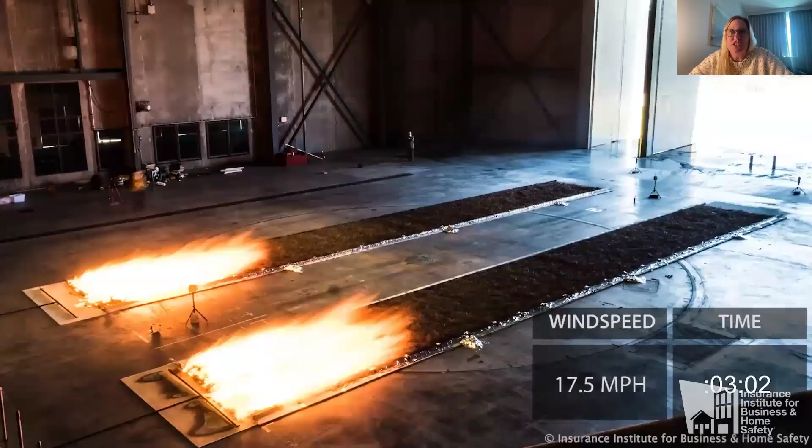All right. So about IBHS. So we know that severe weather disrupts lives and causes financial loss. IBHS delivers cutting-edge research to prevent avoidable suffering, strengthen buildings, inform insurers, and support resilient communities. As an independent nonprofit, IBHS studies wildfire, wind, rain, and hail to develop real-world solutions that help homeowners and businesses build stronger, safer communities. Today, we're going to talk about the latest wildfire science and our program developed based on our research.

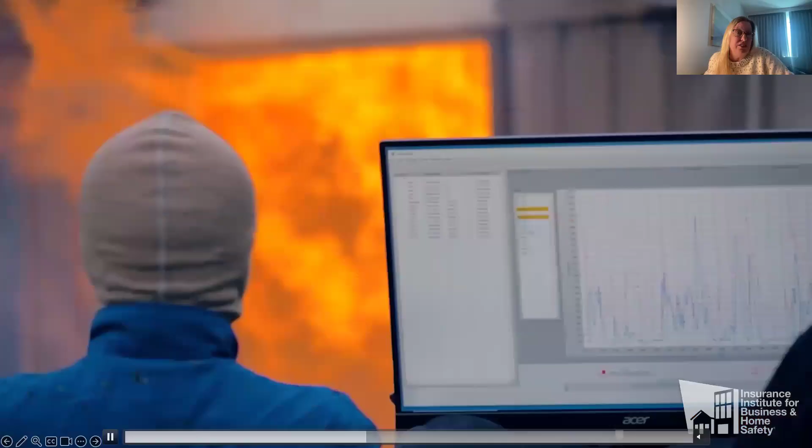Some of this video shows some of the cool research that we do at our lab, and we're going to go through how we do research both in the field and at our research center. So next, this shows you a little bit of the video, what we see. We go out into the field for post events, see what happens in the real world, and then take that back to our research center in Richburg, South Carolina.

And then we analyze each one of the components to see exactly what happens here, why did this happen in the field, and can we replicate it in real life? And eventually this comes out into effective solutions for homeowners and business owners.

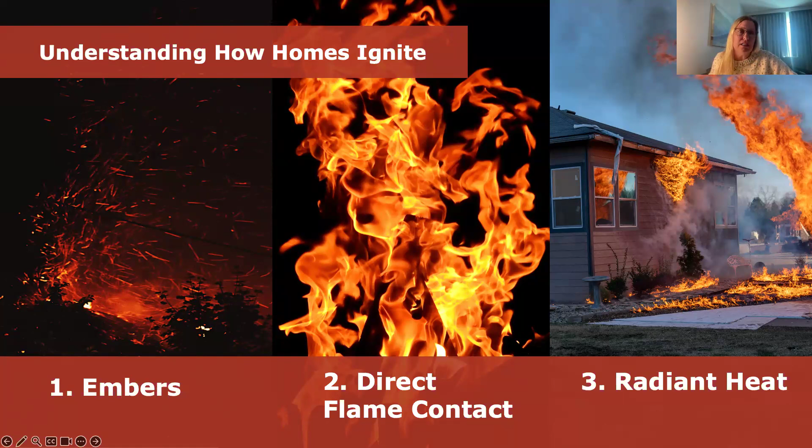So next, the first thing that we want to know is how exactly do homes ignite in a wildfire event? So there's 3 ignition mechanisms. 1, from embers. Number 2, direct flame contact. And number 3, radiant heat. Embers are the leading cause of home ignitions, not the big wall of flames that a lot of people think. It's actually embers.

So wildfires typically enter communities through windborne embers that can travel miles ahead of that wildfire front. Those embers ignite spot fires around and on structures, and these fires generate more embers, leading to flames, radiant heat, and spreading the fire further. Structural embers are typically larger. So once that home catches on fire, those embers are larger than vegetative embers. And then of course, you add the wind component, and that worsens conditions, fanning the flames and carrying the embers deeper into the neighborhoods.

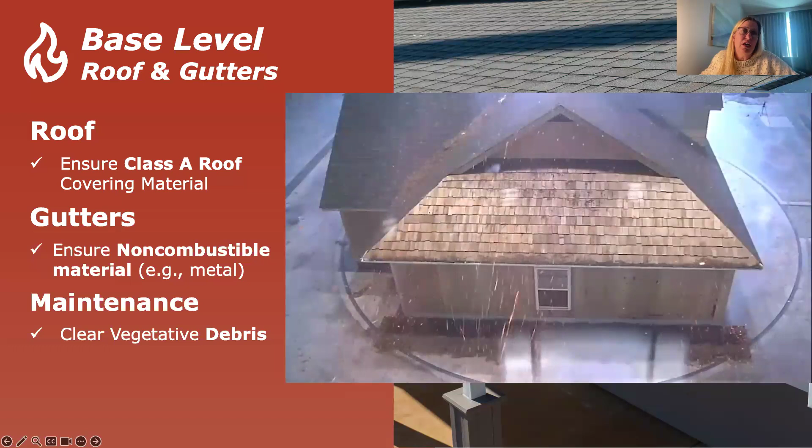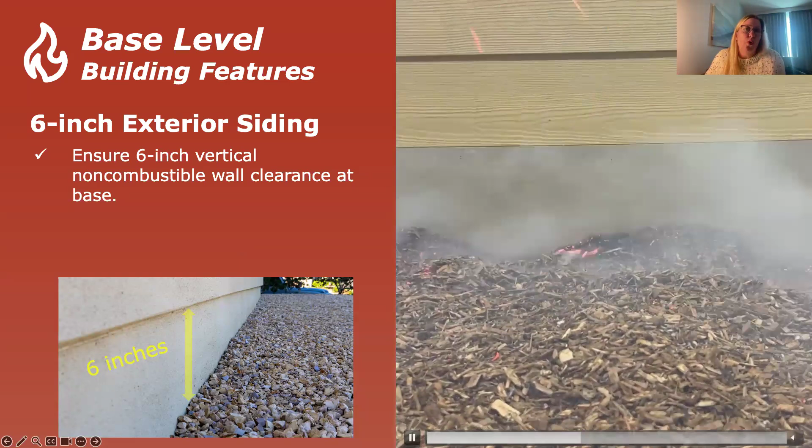Next, you want to have 6 inches of non-combustible exterior siding at the base of your walls. If you already have non-combustible siding, you're fine. The types of non-combustible materials are fiber cement, brick, stone, stucco, or as you can see here, exposed concrete foundation. The types of things that are non-compliant would be vinyl, wood, engineered wood, that type of thing.

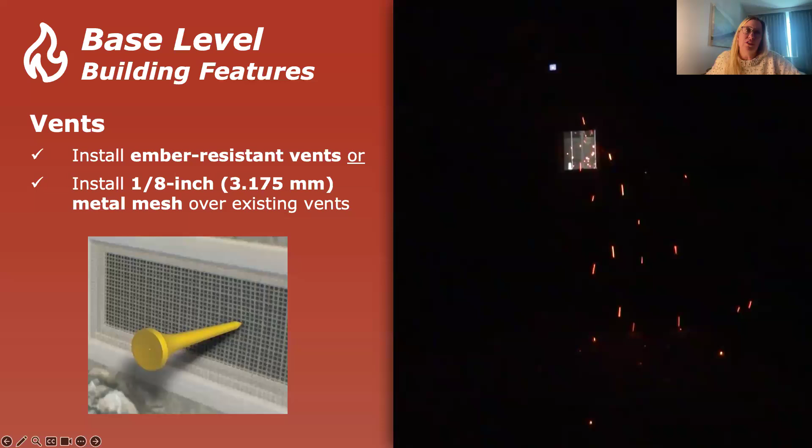Next, this is another big one for the base level. We know that vents are very vulnerable and can ignite your home from the inside out in an ember storm. So we've done testing on different size mesh, and typically most homes come with 1/4-inch mesh. So in modern building code, and through our testing in a wildfire prone area, we ask that you either install the ember resistant vents that you can purchase at the store, or you can order off of Amazon a whole roll of this 1/8-inch or about 3mm size metal mesh, and you can put that over your vents. If it's in the attic, you can do it from the inside.

Another way to test what size vents you already have on the house, you can use a golf tee or a pin or a nail. And if it doesn't go through the mesh, you've got the right size. If it goes all the way through, that mesh size is too big.

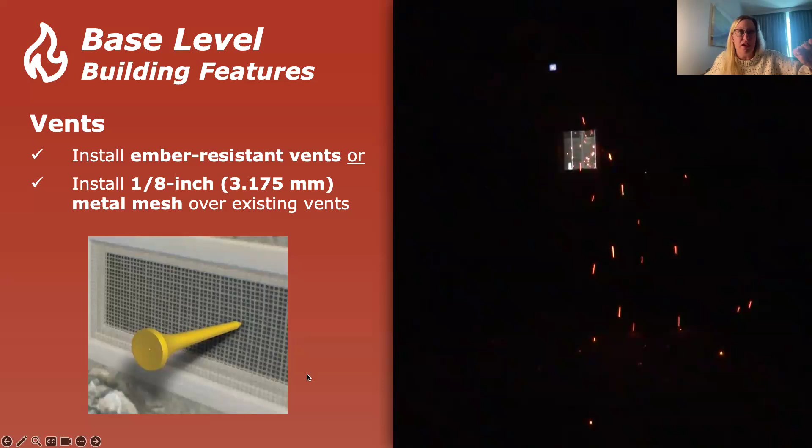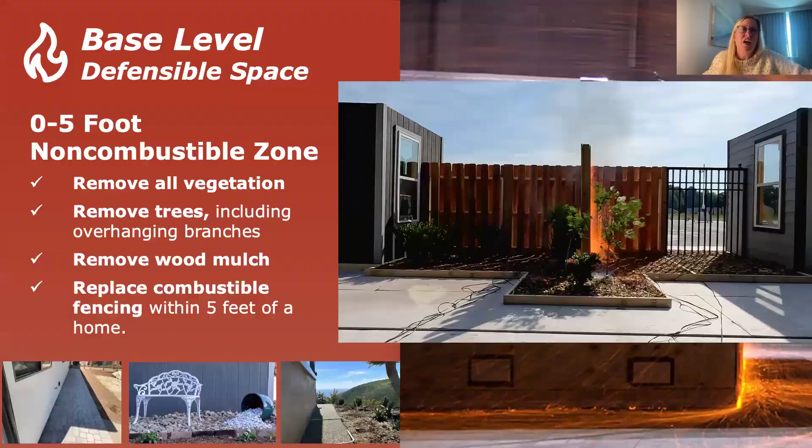So here, the 0 to 5 foot non-combustible zone, you've got to remove all of the vegetation, and that means everything. Trees, we do not allow any trees or overhanging branches in the 0 to 5 foot zone. Removing wood mulch, those are like tiny little matchsticks. And then, of course, combustible fence.

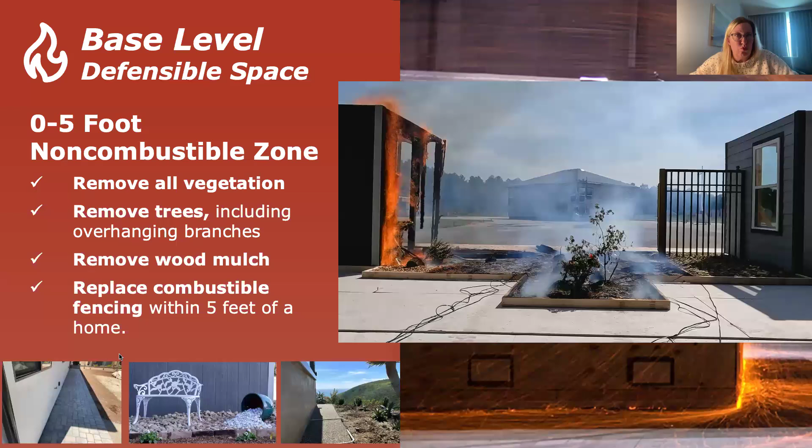This is a demonstration of mulch catching fire, then a bush, then the fence. And then the wood fence acts as if it's like a wick, like a candle, and brings it all the way to the home on the left there, igniting the home, breaking out the window, and then that's a total loss. As you see on the right, there's rocks down on the ground out to 5 feet, and a 5-foot metal fence. That's just replacing 5 feet. That's all we're asking. So if you have a wood fence and you need a retrofit, just that 5 feet, anywhere along the house, especially if it's attached to the home. And this is the most critical area.

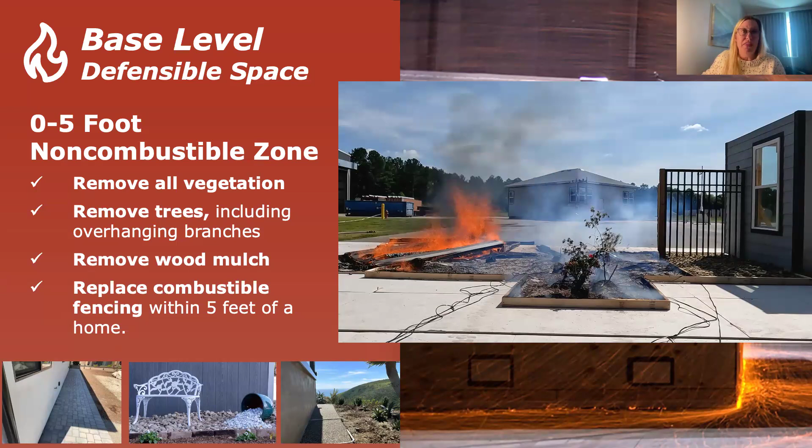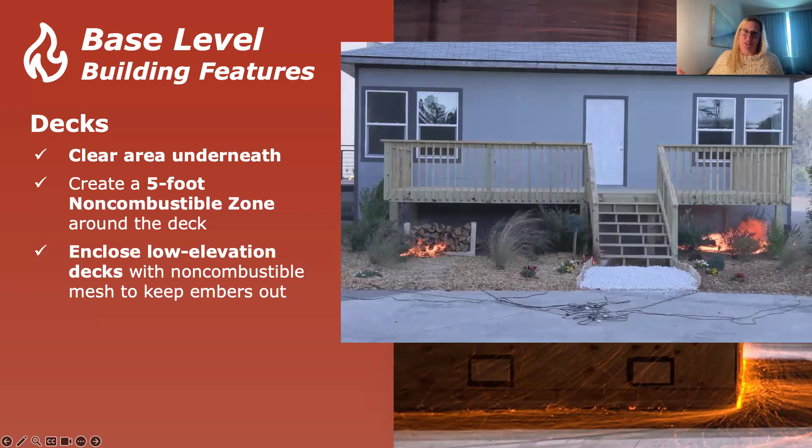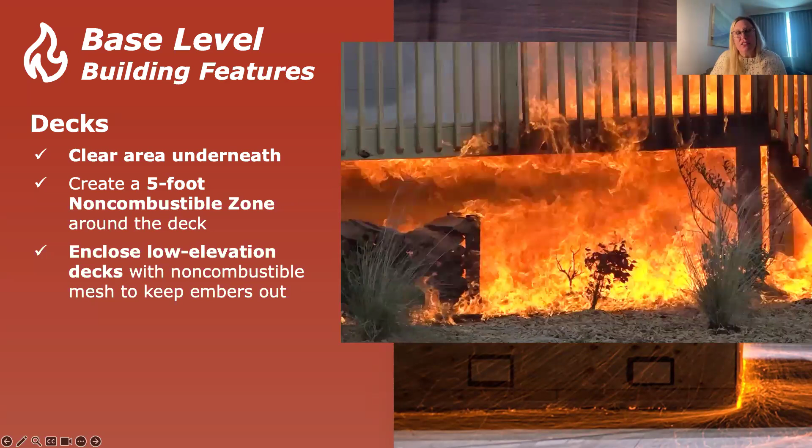All right, next. So for the base level, decks. We also know decks are vulnerable because typically they're made from wood, which we know is combustible, and it's attached right to the house. So you've got to clear the area underneath, no storage of any kind underneath there, creating that 5-foot zone under and around the deck. And then any decks that are about 4 feet or less, you're going to want to enclose with that 1/8-inch metal mesh. That will keep out the embers. It'll keep out debris. We know in a wind event, which carries the wildfire, it's going to put that vegetation under there, and then embers are going to get there and ignite it.

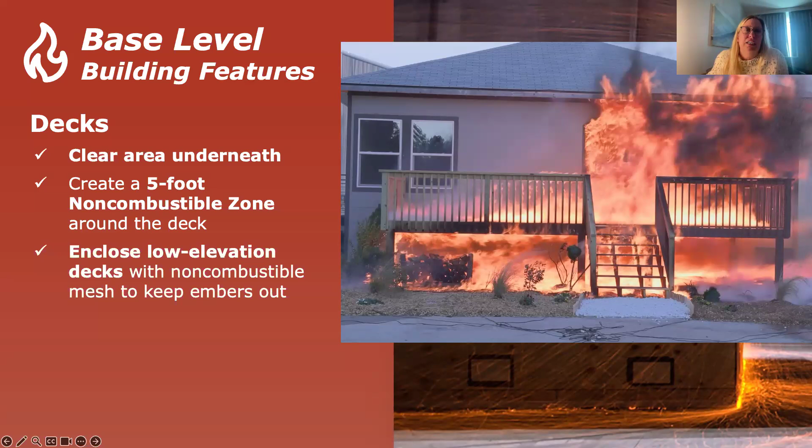So you want to maintain your yard, space out the vegetation. If you have structures like a shed or a hot tub, keep those spaced apart. And then, keep everything at least 10 feet away from the house, big things, and create that 0 to 5 foot non-combustible zone around them.

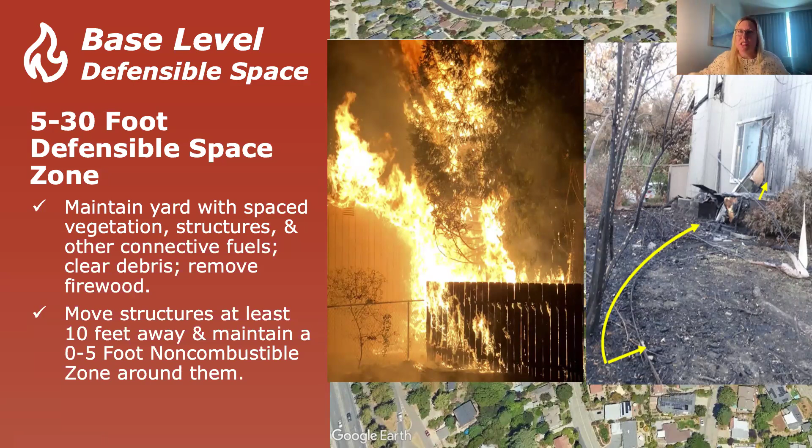Next, this is our next level. So this is where building materials are important. So the siding, you want to install non-combustible siding, and I mentioned those before, stucco, kind of a concrete type siding. And that is so radiant heat and flames can't ignite that siding.

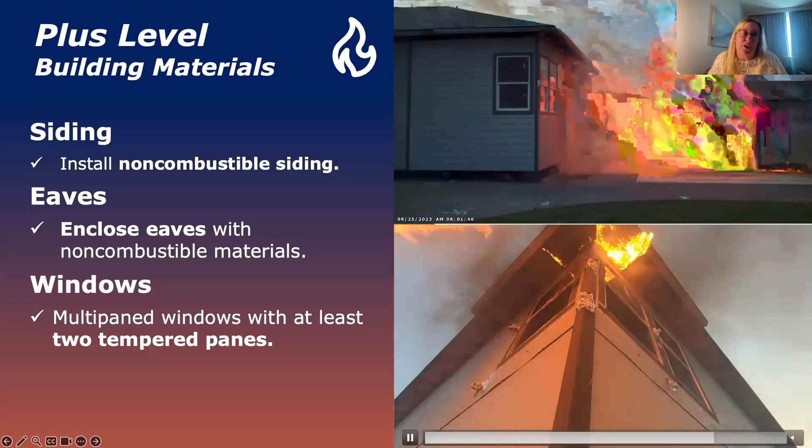And then windows. We've noticed with windows in some of our testing like this, that one of the panes will fall out because of the glazing around the window. So that's why we're asking for at least 2 panes to be tempered. That way, if one falls out, you still have a tempered layer in there. I believe the WUI compliance is one of them being tempered, but we require 2 being tempered. So we go a little bit above code on that.

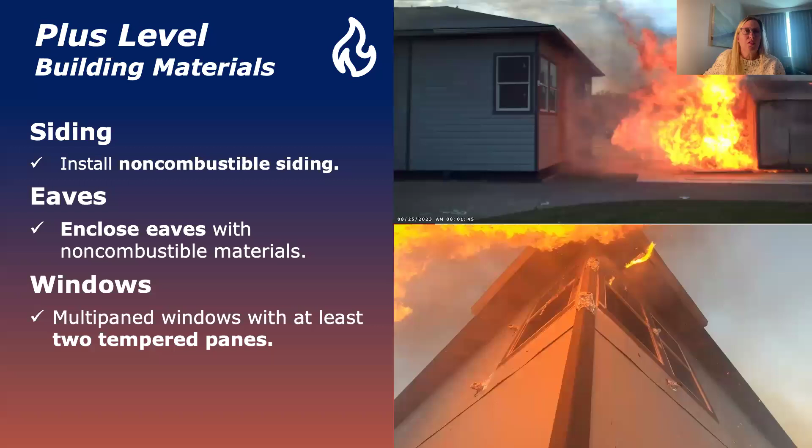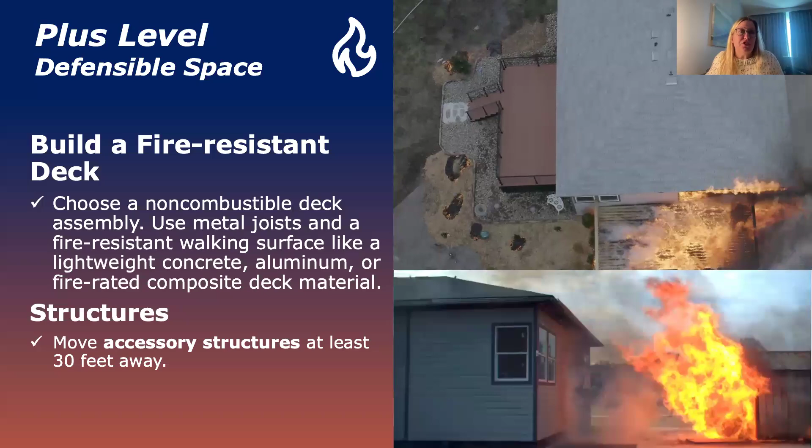And so while our research always continues, the modeling, recent field observations in Lahaina and Los Angeles areas, and experimental testing in the lab all point towards the same system of mitigation actions. So you can have confidence that these pieces matter. We're now looking at a neighborhood scale to solve for conflagration. So we're looking at building density, connective fuels, fuel loads.

And now I'll hand it over to Mark. Mark will provide some insight on our latest post-event deployment. Very good. Thanks, Amanda. Thank you, everybody. So we're going to talk through the LA fires a little bit and just give some examples of things we saw there and how they reinforce the mission.

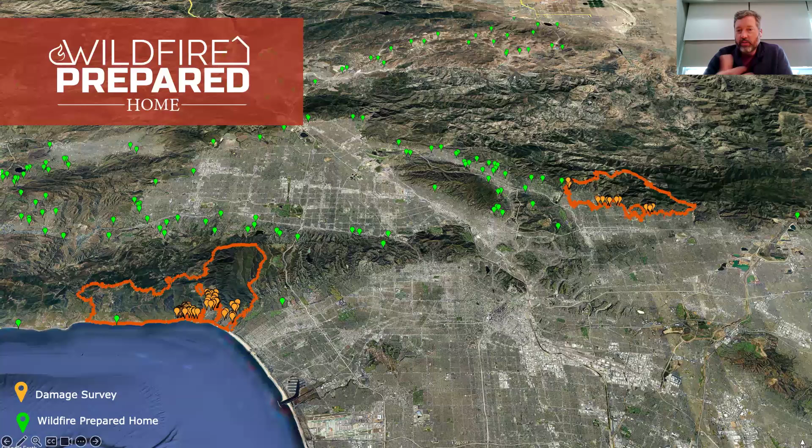These are the two fires. They're separate fires. We've got Altadena on the right-hand side, the Eaton fire, and the Palisades on the left. This photo shows the dots. Those are all wildfire prepared houses that are designated already, and we wanted to be able to look at those. Go ahead, Amanda.

They're all contained at this point. On the Palisades fire, the DINS teams are ongoing in their research to check all of the structures. They completed that on the Eaton fire.

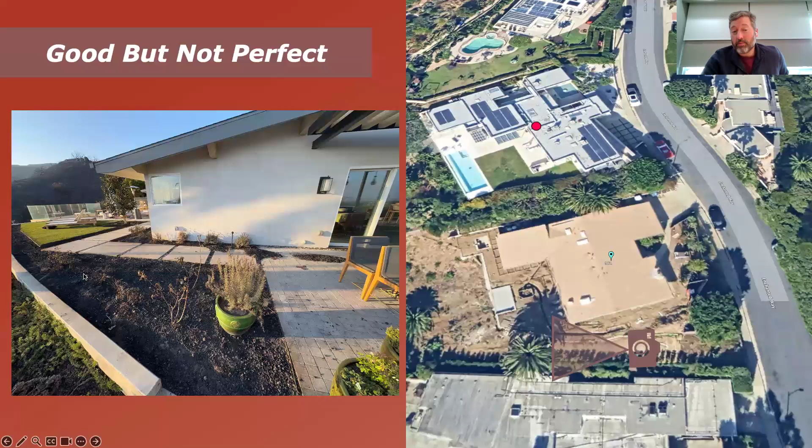In this area, they put the rock down. That's fantastic, and they went much farther than 5 feet. Now we're starting to see a couple of issues. They switched from rock to mulch on this side of the house. Who knows why, but on this side we had mulch. We can see it sprayed across the patio there against the house. All those plants are singed.

On the bottom right of this photo, we can see the wall itself. Stucco turns colors when it gets heat; it actually turns a little bit pinkish. So this house took heat with that mulch burning at the bottom of the wall, which singed all these plants.

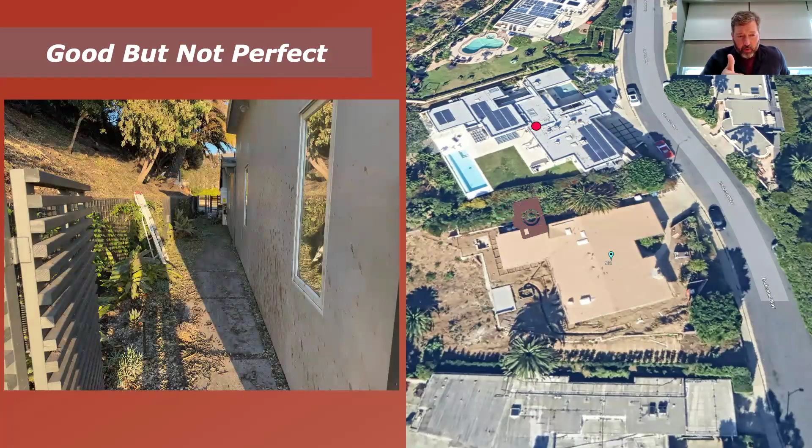And we could just continue to go around. Largely, not much damage. I mean, it survived very well. On the left here, we can see that these trees appeared to take some heat. They're dead now. On this photo, we can see this is a wood fence. That gate there is made of wood.

It's open. The fire service, as they're defending, will actually go and prop open if they can, or basically they'll knock down gates or fences that are attached to houses as much as possible. So this one was propped open at some point. Notice the splatter on the wall. We'll come back to that.

So this area, very, very interesting right here. This is the most damage this house suffered. And if we look on the top of that hill, there was some type of vegetation up there that burnt. Right here at the bottom, there's not a lot here, but we can tell what was. If we look on the ground, Amanda's going to point out these little bars. So there's a bar there, and there's a bar over on the other side. We saw a lot of these.

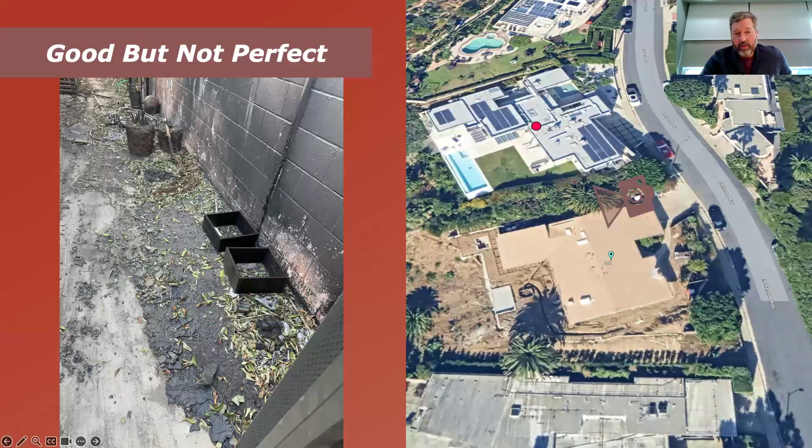What that is, this was a recycling bin. You can see a can, maybe a glass bottle or something there, and then the other side was likely trash. So these bins, these municipality bins that are picked up by the truck, they're all standardized at this point. They're made of plastics. Well, go ahead, Amanda. Well, I think there's another photo of that.

The plastic themselves may or may not ignite, but the contents of those, especially think of recycling, you're putting cardboards and papers inside of those cans. Those things are definitely combustible. So this is looking just to the left of that previous photo. This area took a lot of heat when those things burnt.

So it removed the paint. Even the gas meter at the bottom corner there, it melted the gas meter a little bit. So the house survived, but took damage. And we can just learn from these parts. We need to move those bins away from the house in a red flag event. This is another structure, just a connected fuel story here.

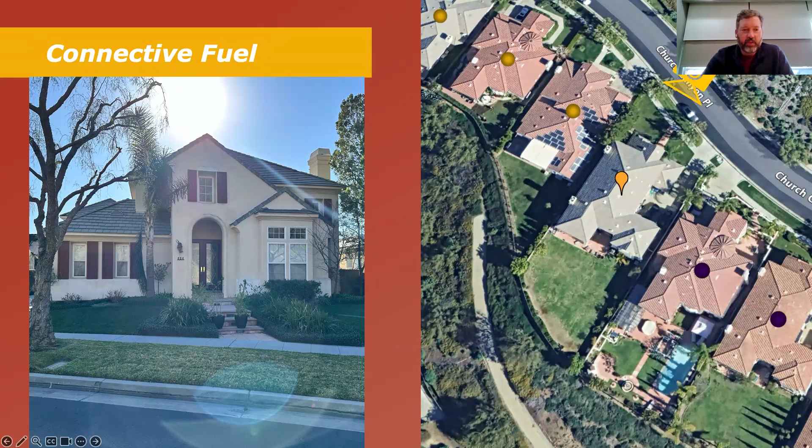Go ahead, you can jump in. So this neighborhood was largely built with stucco and steel studs. It was very well-built housing. If you see the house on the left, it was a complete loss. The walls generally will stay standing because they were steel construction, but they were burnt out.

This here, we had a wood gate, and otherwise great. We've got stucco, we've got steel studded construction, we've got a masonry fence in between them, but that masonry fence was covered in vines, and we put a wood fence, a wood gate, connecting that masonry fence to the house, and that gate burnt.

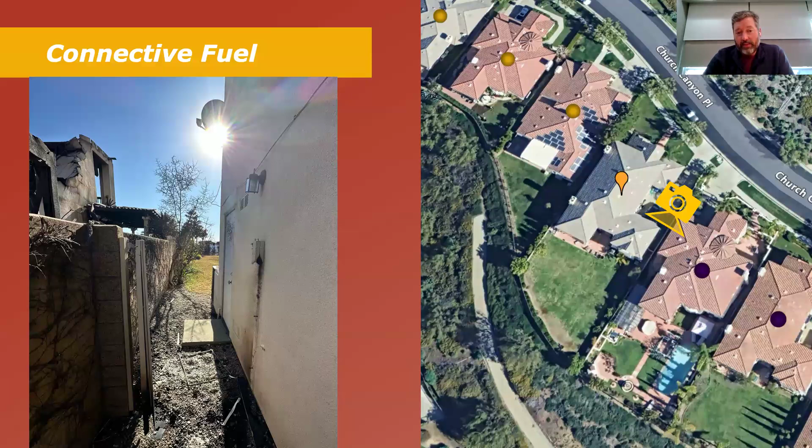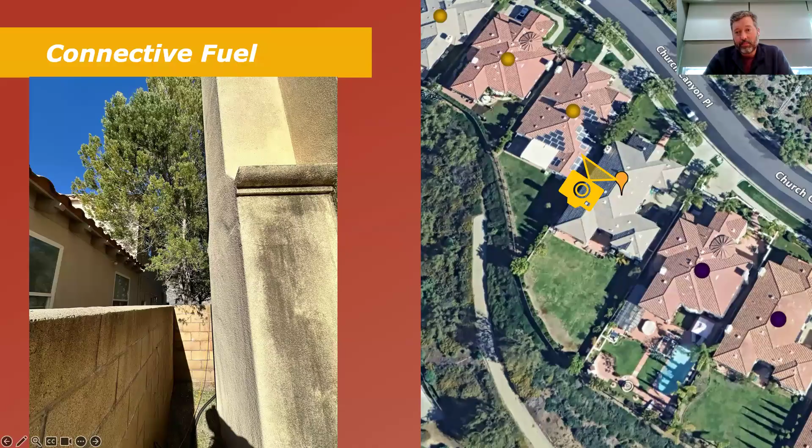On the other side of this house, we have a very lucky situation, connective fuel between these two structures. Thankfully, this didn't ignite. If this house had ignited, that connective fuel would have carried it to the next house, and conflagration would continue. Conflagration factor, structure density, the connective fuels, the building materials, all these things matter. And our goal is to learn more on how these pieces fit together and where we can impact that, where we can pick up one of those dominoes in that domino line.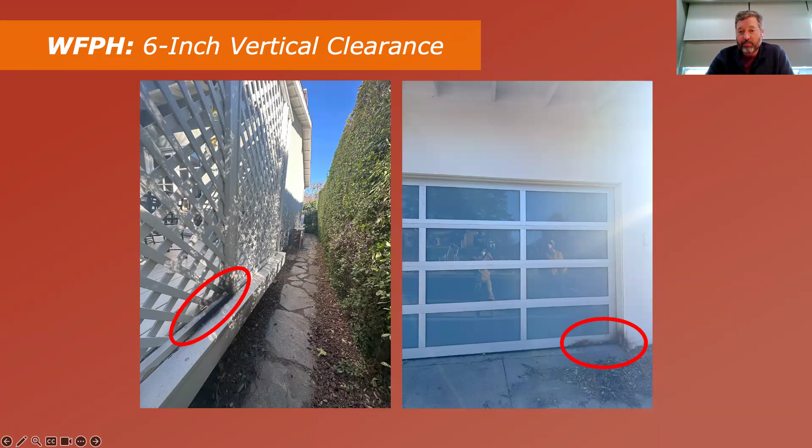The tempered glass is actually tempered with heat, and it holds up to that heat. So it can take that and survive it without shattering. When it does shatter, it makes those little bitty square pieces.

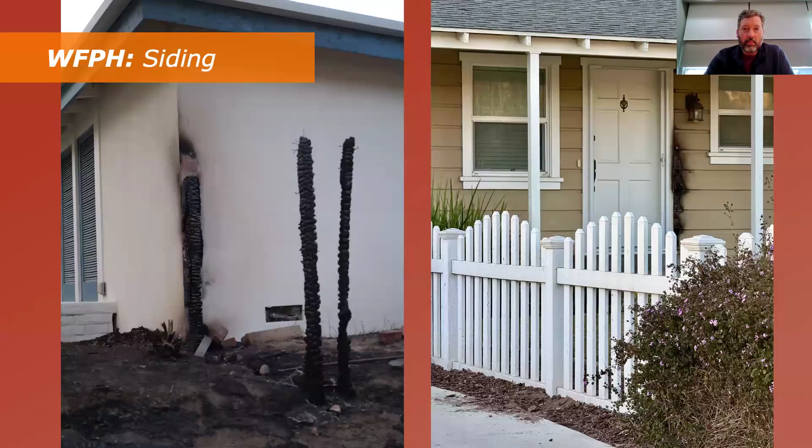The building materials and the gates: on the left here we have, again, stucco siding. This was a gate attached to the house. Now this was defended. These pieces wouldn't be standing if it hadn't been defended. But you can see even the nails still sticking out of the top there. Typically they'll come in and knock down the gate and throw it in the front yard and get it away from the structure. On the right-hand side here, this is wood siding.

Inside of that cavity in the doorway, which we do see a lot. Depending on how it's installed, there's a little bit of a pocket inside the framing between the structure and the actual door frame. It usually has some insulation, but it's just a pathway for flames to grow.

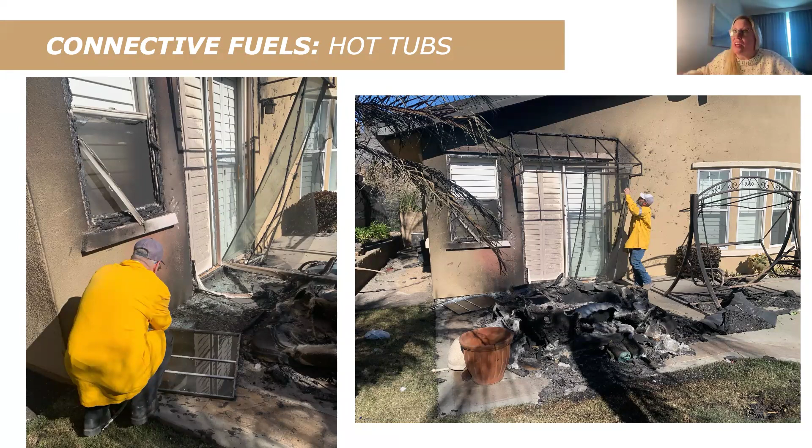And this example right here for hot tubs, we're actually addressing hot tubs more closely in our forthcoming update of the standard. But this hot tub is sitting on a non-combustible patio, which is ideal. We don't want it on a wood structure if we can avoid it. The close to the house is the issue. If we had moved this hot tub 10 feet away, a 10-foot separation, it's unlikely that we would have nearly as much damage to that house.

We don't think this house was defended. There's not evidence outside of this. There wasn't water. Typically CAL FIRE will go through and remove plants that are next to the house that they're defending, if they're doing things to the house to keep it from getting more damage, and they'll barricade doors and things that are open. So none of that happened on this house. We don't think this actually was defended at all. The house survived as is, which was amazing. So this is a great example. We spent probably an hour here documenting this thing. It was great.

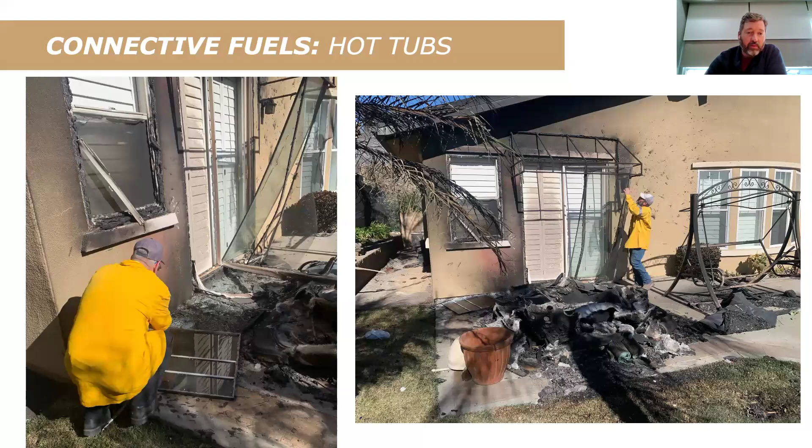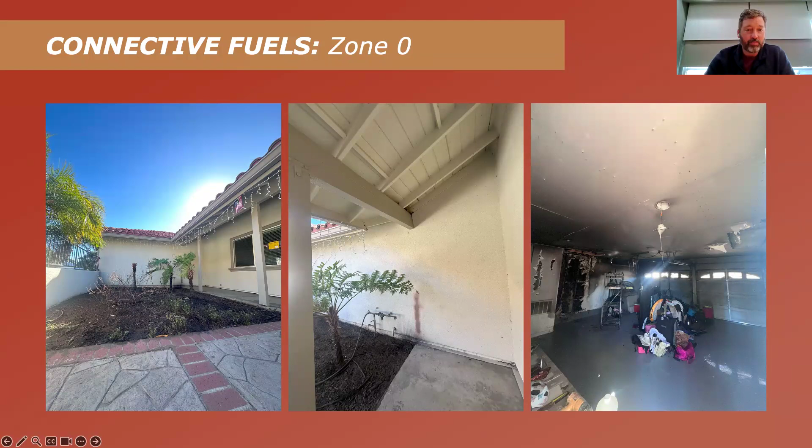We're going to kind of go through these fairly quickly. This is a connective fuel story. So on the left, we've got a bunch of plants. You can see some of the shrubbery that's still there. It caught the eaves on fire. Again, it took intervention to keep this house from going away.

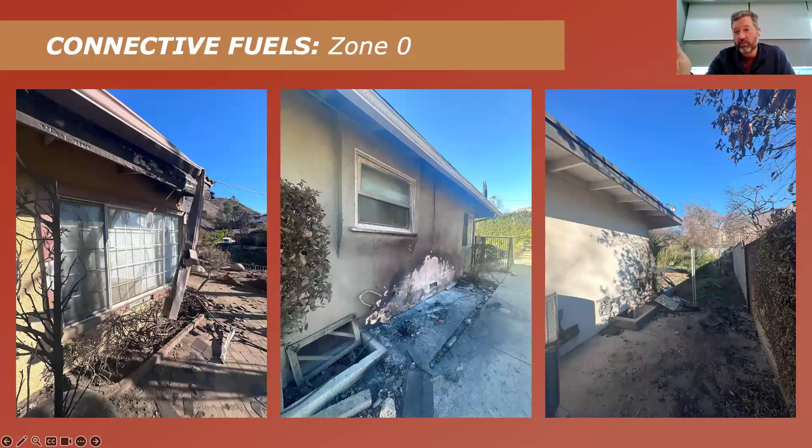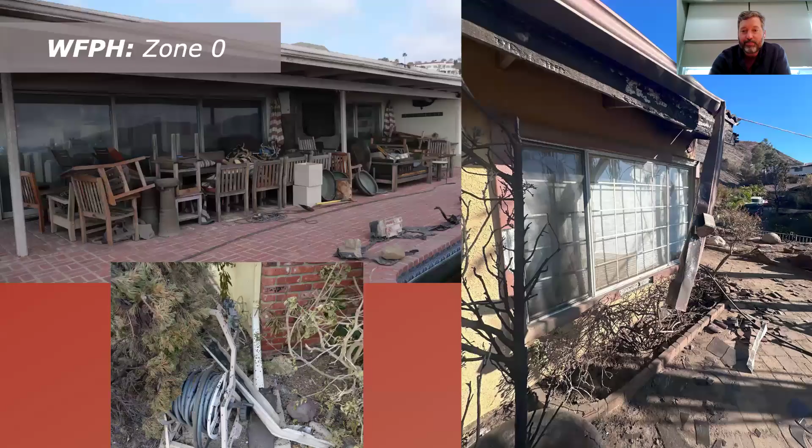You know, human nature, we gotta change people's behavior, and this is a very lucky situation. Look at all of the stuff that is stored underneath this. It's all wood, and this house survived. But these are examples of things where we need to reinforce changing human behavior and living adaptive to wildfire.

We know when these events are going to happen. We've got a warning, there's red flag days. I'm sure Canada has something similar, and so we can tell people, hey, here are the days we need to make sure that we're being safe for the next 2 weeks, and mitigate these things in those situations. Go ahead, Amanda.

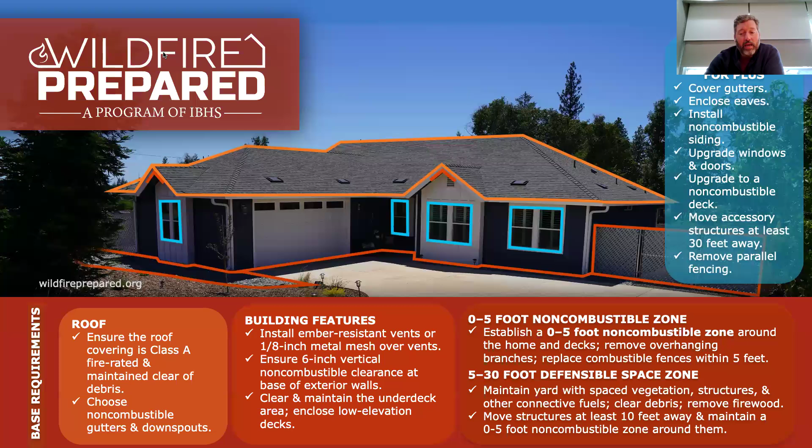Let's see. Glenn McGillivray asks, would you say that the Class A roof issue is kind of solving itself? That is, do most new homes and re-roofed existing homes already have Class A? In California, yes. That is not necessarily true everywhere. I don't know, I have no idea in Canada. California started requiring Class A roofing materials back with Chapter 7A. So we're well into Class A roofing, but that's not necessarily the case in other states. There are still other levels of roofing that are sold. Asphalt shingles that are not Class A are still available in other areas.

Yeah, we saw a lot of cedar shingles in Jasper. There was a lot of cedar roofing in the downtown area, and every burned commercial block had cedar roofs that ignited. So they're out there.

Let's see, an anonymous attendee says, fantastic information. So just kudos for the great presentation. Thank you.

An anonymous attendee asks, how can the ember effect or firebrand effect reduce the effectiveness of wildfire mitigation requirements? Can you repeat that again? Yeah, anonymous attendee, I'm not sure I understand that question either. How can the ember effect or the firebrand effect, I think meaning the fact that so many ignitions are caused by brands, how do they reduce the effect of wildfire mitigation requirements? So, given this stream of brands that come off of fires, I guess I would reinterpret the question to say, if you got the plus level of wildfire prepared, how much do you think your ignition probability is reduced relative to a non-compliant house? In a fire, pick a fire.